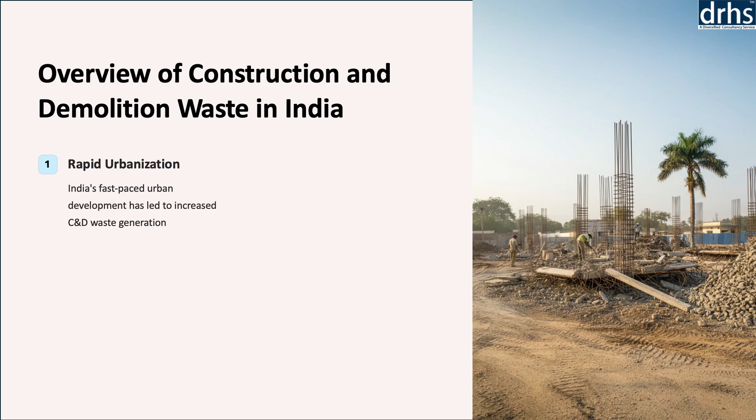The second factor is related to the economic impact of managing C&D waste, which is substantial. Proper waste management can reduce construction costs through material recovery, recycling, and reuse. Recycling concrete, steel, and other materials lowers dependency on raw resources, contributing to the circular economy. However, improper disposal of C&D waste leads to inefficient resource use, increased cost for waste management, and environmental degradation.

The third factor is related to the environmental concerns associated with C&D waste, which are significant. Improper disposal contributes to air pollution, clogged drains, and groundwater contamination. Additionally, the depletion of landfills and the illegal dumping of debris exacerbate urban environmental challenges. Recycling C&D waste can mitigate these effects by reducing landfill usage and minimizing pollution.

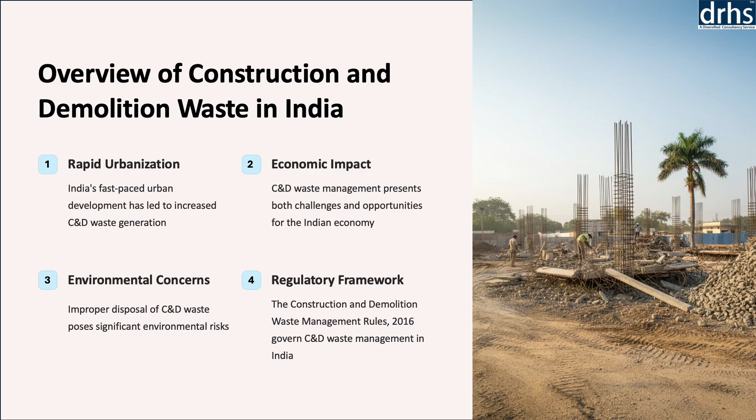The fourth factor is related to India's regulatory framework for C&D waste management, which is evolving over time. The Ministry of Environment, Forest and Climate Change introduced the Construction and Demolition Waste Management Rules 2016. These rules mandate source segregation, recycling, and the use of recycled products in construction. Urban local bodies are responsible for implementing these rules and setting up recycling facilities. Despite these regulations, enforcement remains inconsistent and increased compliance is needed to improve waste management practices.

Now we shall see the magnitude of C&D waste in India. India's construction boom has led to a substantial increase in construction and demolition waste generation. According to a report by the Center for Science and Environment, the country produces approximately 150 million tons of C&D waste annually. However, formal collection and processing infrastructure covers only a fraction of this waste, highlighting the need for an enhanced waste management system. The composition of C&D waste varies based on the type of construction activities.

Approximately 30% of the total C&D waste consists of concrete, including structural elements like beams and slabs. Concrete waste can be recycled into aggregates used for roads, construction, pavement blocks, and new construction production. Another significant component is excavated material, accounting for 25% of the total waste. This includes soil, sand, and stone, often generated during land preparation and excavation for foundations. Proper reuse of these materials can reduce the demand for virgin resources.

Bricks and masonry make up around 15% of the total C&D waste. These materials can be crushed and reused as a base material for roads or as a filler in new construction. The efficient recycling of bricks and concrete helps reduce environmental pollution and raw material consumption.

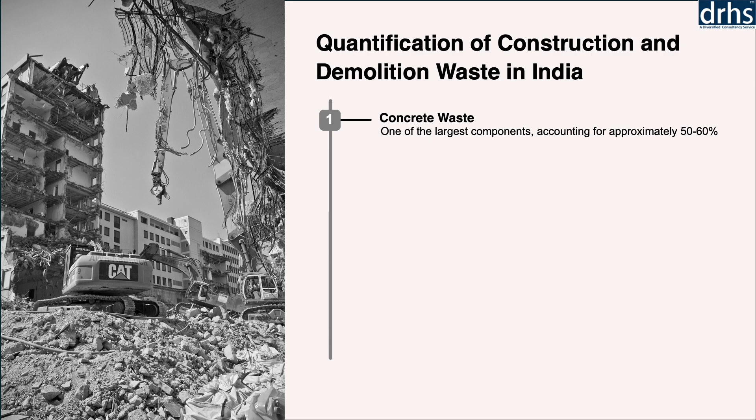Concrete is one of the largest components of C&D waste, accounting for approximately 50 to 60% of the total waste generated. Concrete waste is often generated from demolished buildings, roads, and infrastructure projects. Proper recycling of concrete can produce aggregates that can be reused in new construction projects.

The second is related to brick waste. Bricks are another significant component of C&D waste, making up about 15 to 20% of the total waste. Broken or discarded bricks are often sent to landfills, although they can be recycled into new bricks or used as an aggregate in construction.

The third is related to wood waste. Wood accounts for around 5 to 10% of C&D waste. It is commonly produced during the demolition of buildings and the removal of furniture, doors, and windows. While wood is biodegradable, it still contributes to the overall volume of waste, and improper disposal can cause environmental problems.

Fourth is related to metal waste. Metals like steel, iron, aluminium, and copper contribute around 5 to 10% of the C&D waste. These materials are often recyclable, but improper disposal leads to resource wastage. Recycled metal can be reused in construction and infrastructure projects.

The other is related to glass waste. Glass, though a smaller component of C&D waste at approximately 1 to 5%, can be recycled and reused in construction. However, its disposal is often problematic as it does not degrade naturally and can pose a risk to the environment as well as to human beings.

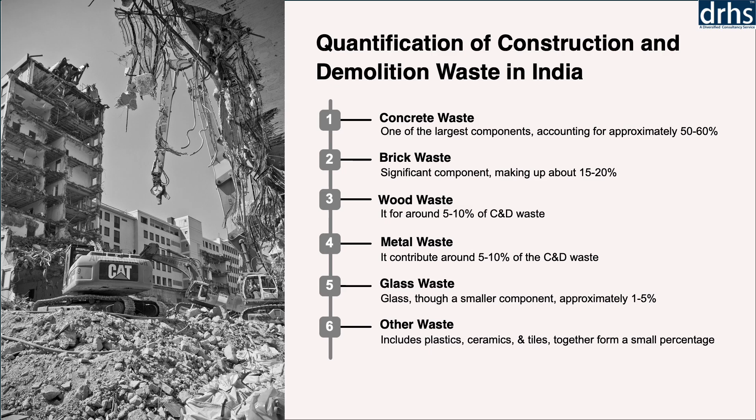Now we shall discuss the regional distribution of construction and demolition waste in India, highlighting the contribution from the various urban and rural regions.

First is related to major metropolitan areas. India's largest metropolitan cities, Delhi, Bombay, Ahmedabad, and Bengaluru, are responsible for generating nearly 40% of the country's total C&D waste. These cities have undergone rapid infrastructure development, including urban renewal projects, large-scale real estate construction, road expansion, and public transportation systems. For instance, Delhi, with its continuous expansion of metro network and flyovers, generates significant volumes of C&D waste.

Mumbai's urban densification and redevelopment of slums contribute heavily to the rising waste level. Similarly, Bangalore's booming IT and residential infrastructure sectors make it one of the top C&D waste producers. These metropolitan areas also face challenges in managing and recycling waste as the disposal often exceeds the capacity of existing treatment plants.

The next comes the tier-two and tier-three cities. Emerging urban centers like Pune, Lucknow, Indore, and Chandigarh are experiencing a construction boom due to the increased demand for housing, commercial space, and infrastructure. These cities contribute approximately 30% of India's C&D waste.

Next is weak enforcement. Weak implementation of C&D waste management regulations contributes to non-compliance. Although the 2016 rules mandate that all local authorities establish waste management plans, enforcement remains lax. Many municipalities lack dedicated monitoring systems and resources to ensure proper collection, transportation, and processing of C&D waste. This weak oversight leads to rampant illegal dumping and environmental degradation.

The next is economic barriers. The high cost of recycling infrastructure and transportation limits private investment in C&D waste management. Setting up common construction and demolition waste treatment facilities requires significant capital. Additionally, operational costs are higher, reducing profitability for recyclers. Financial incentives, subsidies, and public-private partnerships are needed to enhance economic viability.

The last is limited market for recycled products. Despite regulatory mandates encouraging the use of recycled material, the market for recycled aggregates and other C&D derived products remains limited. Builders often prefer virgin material due to perceived quality concerns and strength of the material, despite evidence showing comparable performance. The lack of quality certification mechanisms and promotional strategy further impedes market growth for recycled products.

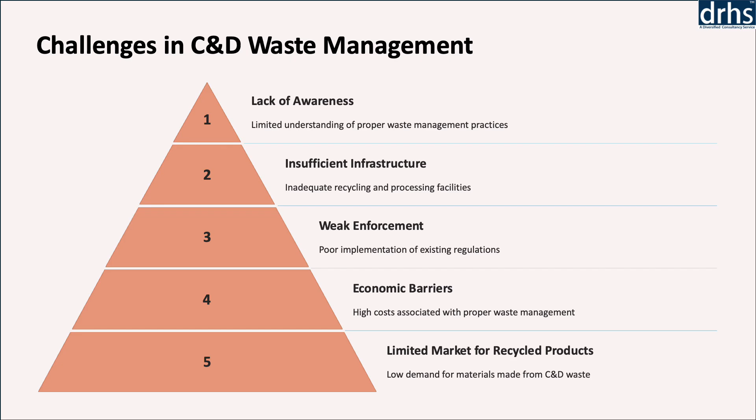Let us discuss the impact of construction and demolition waste on the environment and the economy. India's rapid urbanization and infrastructure development generate millions of tons of C&D waste annually. Mismanagement of this waste poses significant environmental and economic challenges. Let us first explore the environmental impact, starting with landfill saturation.

The improper disposal of C&D waste has led to the saturation of existing landfills. Since a substantial portion of this waste includes materials like concrete, bricks, and debris that are not biodegradable, it consumes valuable landfill space that could otherwise be used for municipal solid waste. The unauthorized dumping of C&D waste on roadsides and open spaces further exacerbates the problem, affecting the urban landscape and the drainage system.

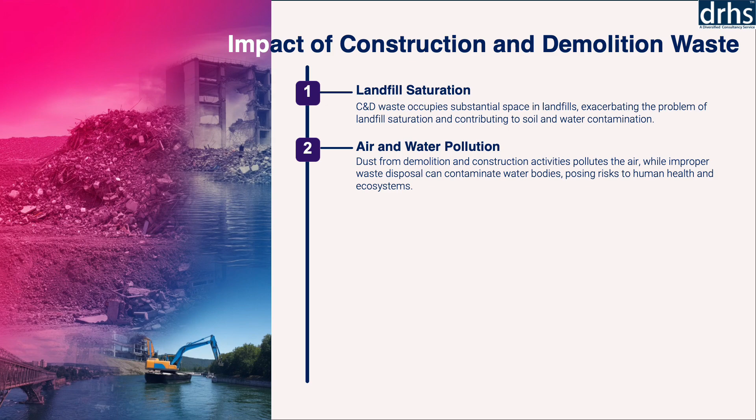The next issue is related to air and water pollution. C&D activities produce dust and particulate matter, that is PM10 and PM2.5, significantly contributing to air pollution in urban areas. Dust from demolition and construction sites causes respiratory issues, particularly in densely populated cities like Delhi and Mumbai. In addition, improper disposal near water bodies can result in sedimentation buildup and water pollution, affecting the aquatic ecosystem and reducing water quality.

The next issue is related to resource depletion. Construction relies heavily on natural resources such as sand, stone, and aggregates. Excessive extraction of these materials depletes finite resources, leading to soil erosion and habitat destruction. Failure to recycle C&D waste results in increased demand for virgin material and intensified resource exploitation.

So these were the environmental impacts, and now shall we explore the economic impact. This is related to lost economic value. C&D waste contains valuable materials like metals, concrete, and wood that, if recycled, could generate economic returns. However, limited recycling results in the loss of potential revenue.

Studies suggest that efficient C&D waste management could significantly reduce costs and enhance sustainability. Recycling concrete and using secondary aggregates reduces the need for new material, offering economic savings.

The next economic impact is related to increased construction cost. The lack of affordable recycling infrastructure and proper waste disposal mechanisms increases overall construction costs. Builders face higher expenses when transporting waste to distant disposal sites or using expensive virgin materials instead of recycled products. Investing in waste recycling plants and adopting a circular economy approach could mitigate these costs.

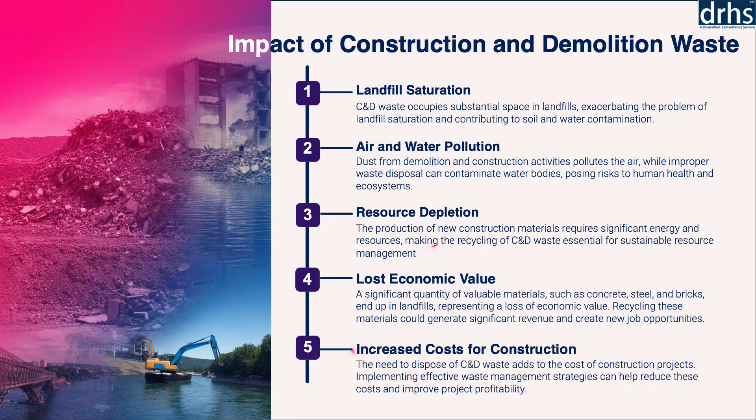In conclusion, effective C&D waste management is crucial for mitigating environmental pollution, conserving natural resources, and realizing economic value. Implementing stricter regulations, enhancing recycling infrastructure, and fostering market demand for recycled materials will be essential to achieving sustainable construction practices in India. Now let us explore the impact more deeply of C&D waste on urban development.

The impact of construction and demolition waste on urban development in India is significant, as rapid urbanization drives massive infrastructure and housing projects, generating a vast amount of debris. Improper management of C&D waste hinders sustainable growth in three key areas.

The first is related to urban renewal projects. Urban renewal projects in cities like Delhi, Mumbai, and Bangalore produce large quantities of C&D waste from demolishing old structures. When this waste is not properly recycled or disposed of, it overruns landfills and open spaces, leading to land use inefficiency and delays in project timelines. Effective recycling systems reduce debris and ensure smoother, faster urban regeneration projects. However, weak enforcement of the C&D Waste Management Rules of 2016 adds to the inefficiency.

The second is related to infrastructure development. Major infrastructure initiatives including highways, bridges, and smart city development generate extensive C&D waste. Without efficient recycling plants, these projects cause land and water pollution, impacting the urban ecosystem. Infrastructure construction also leads to increased resource depletion, as natural materials like sand and aggregates are used in excess due to limited reuse of recycled material. This escalates project costs and environmental degradation.

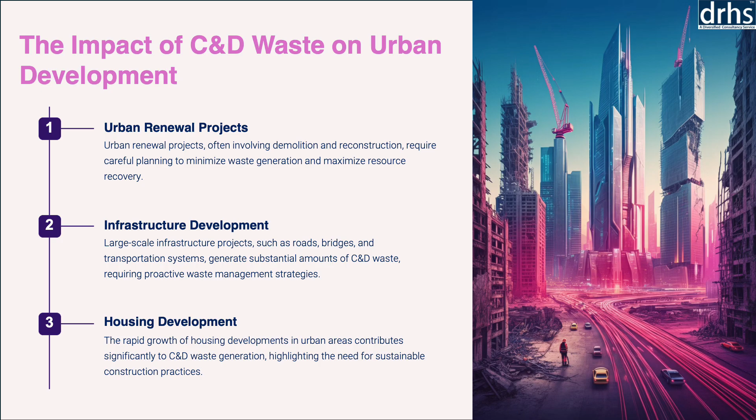Now, since we have discussed the various types of impact on this sector, let us explore the different roles involved.

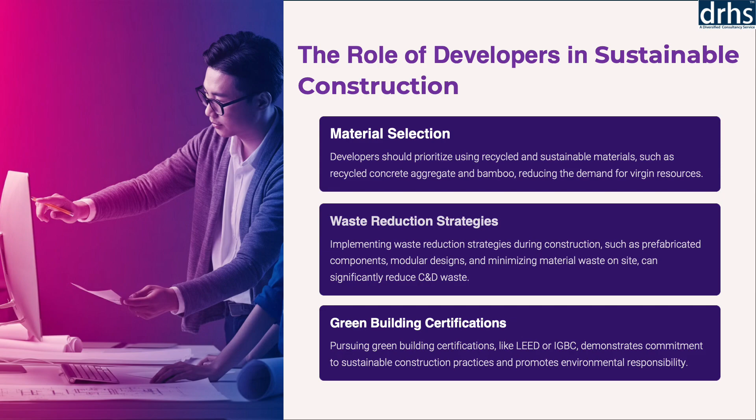In conclusion, developers in India have a significant role in promoting sustainable construction through careful material selection, effective waste reduction strategies, and comprehensive green building practices. By adopting these practices, developers not only contribute to environmental preservation but also create economically viable and socially responsible projects.

Now we shall discuss the role of the construction industries. The construction industry in India plays a pivotal role in the nation's economic development, contributing significantly to the GDP and providing employment to millions.

As the industry grows, adopting sustainable construction practices has become increasingly important. Sustainable practices such as using eco-friendly materials and energy-efficient design help reduce the environmental impact of construction projects. For instance, the use of recycled material like fly ash in cement production can significantly lower carbon emissions.

Investing in waste management technology is another crucial aspect of sustainable construction. Advanced technology can help manage construction and demolition waste more effectively, reducing the amount of waste sent to landfills and promoting recycling. This not only minimizes environmental harm but also contributes to resource efficiency.

Partnering with waste management companies is essential for ensuring proper waste disposal and recycling. Collaboration with specialized companies can enhance the industry's ability to handle waste responsibly and sustainably, leading to innovative solutions for waste reduction and management. By adopting sustainable practices, investing in waste management technologies, and partnering with waste management companies, the construction industry in India can contribute to a greener and more sustainable future.

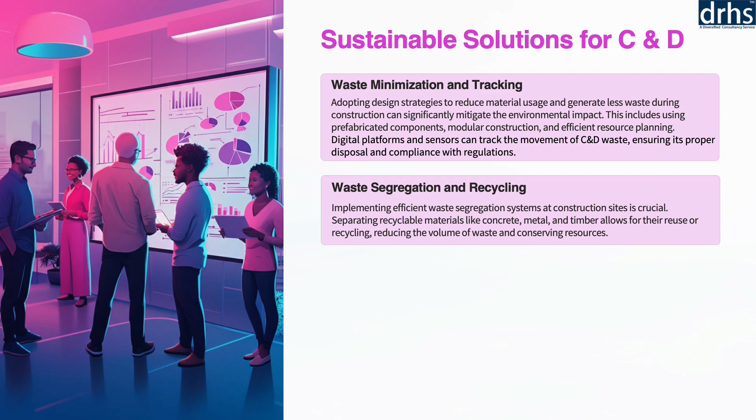The next is waste segregation and recycling. Effective waste segregation at source is essential for recycling efforts. Materials such as concrete, wood, metal, and plastic should be separated to facilitate their recycling. Recycling these materials reduces demand for virgin resources and lowers the environmental impact. Recycled material can be reintroduced into the construction process, promoting a circular economy. For example, using recycled concrete aggregates in new construction projects is an eco-friendly practice gaining traction in India.

The next is waste treatment and processing. Waste treatment involves various methods to process waste, making it safer and more manageable. Biological treatment processes like composting can handle organic waste effectively. Chemical treatments can detoxify hazardous materials, ensuring they don't harm the environment. Mechanical processes such as crushing and screening can prepare material for recycling. These treatment methods help reduce the volume and toxicity of construction and demolition waste.

The next, most important, is waste to energy solutions. These are innovative approaches to managing construction and demolition waste. Technologies like incineration and gasification convert waste into energy, providing a dual benefit of waste reduction and energy generation. These processes help divert waste from landfills and contribute to India's renewable energy goals. For instance, the implementation of waste to energy plants in urban areas can significantly reduce the waste burden while generating electricity.

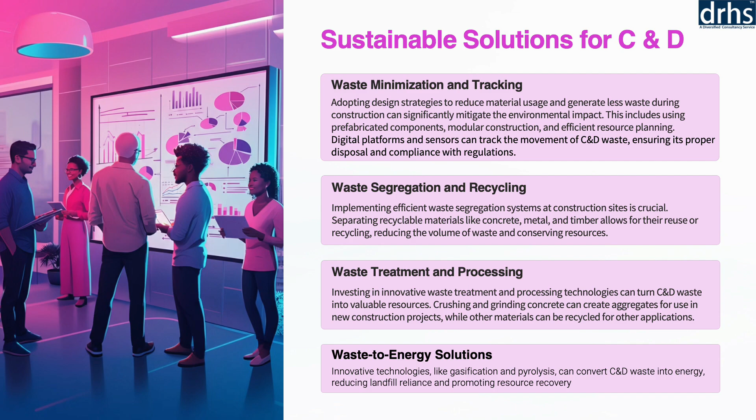Implementing these sustainable solutions requires collaboration among government agencies, private sectors, and local communities. By adopting waste minimization, segregation, recycling, treatment, and waste to energy solutions, the construction and demolition industry in India can move towards a more sustainable and environmentally responsible future.

Now, the next role is related to research and development. The construction and demolition industry in India is a significant contributor to waste generation, necessitating effective management strategies. Research and development, R&D, plays a crucial role in addressing these challenges through innovative solutions such as waste to energy technologies, material recovery and recycling, and sustainable construction materials.

First is waste to energy technologies. These offer a sustainable solution by converting waste material into energy. The Ministry of New and Renewable Energy in India promotes various waste to energy options, including biomethanation, which converts organic waste into biogas and manure. This not only helps in managing the waste but also generates renewable energy.

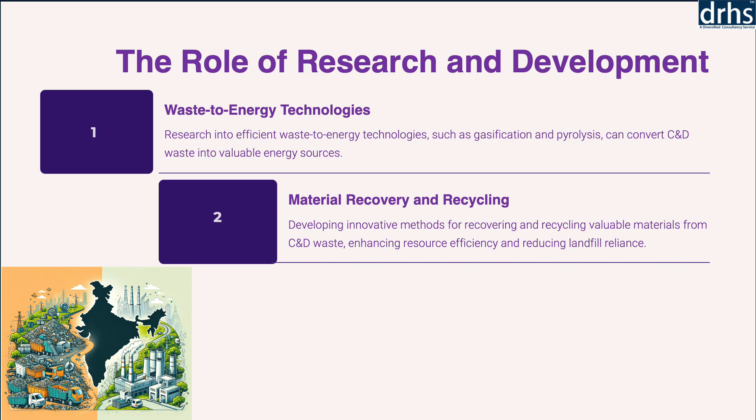The next is material recovery and recycling. Recycling construction material is essential for reducing environmental impact. Techniques such as remanufacturing, downcycling, and upcycling are employed to recover and reuse materials like concrete, bricks, wood, and metals. This approach minimizes waste, conserves resources, and supports a circular economy.

The next is sustainable construction material. The use of sustainable materials in construction is gaining traction. Materials such as recycled concrete and eco-friendly bricks reduce the environmental footprint of construction projects. R&D efforts focus on developing new materials and improving existing ones to enhance their performance and sustainability.

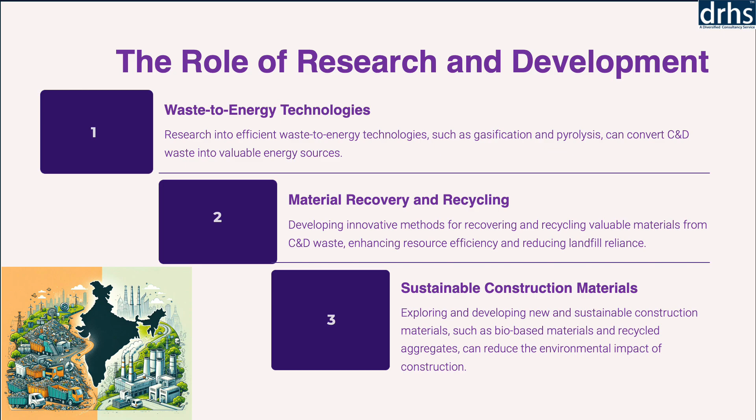Overall, R&D in the construction and demolition industry is vital for promoting sustainable practices and reducing environmental impact. By leveraging waste to energy technology, material recovery and recycling, and sustainable construction material, India can move towards a more sustainable and efficient construction sector. Now we shall discuss some of the best international practices.

The construction and demolition industry in India can benefit from international best practices to enhance sustainability and efficiency. Here are some notable examples. First is Singapore's waste to energy approach. Singapore has successfully implemented a waste to energy approach, converting construction and demolition waste into energy and significantly reducing landfill reliance. The National Environment Agency oversees waste management, ensuring a high recycling rate of 99% of construction and demolition waste since 2013. This approach not only manages waste effectively but also generates renewable energy.

The next country is Japan's construction recycling system.

Japan has a well-established construction recycling system supported by the Construction Material Recycling Law enacted in 2000. This law mandates contractors to sort and recycle specific construction materials such as concrete, asphalt, and wood from demolition projects. The system includes strict regulations and incentives to promote recycling, aiming for a recycling rate of 95% for specified construction material.

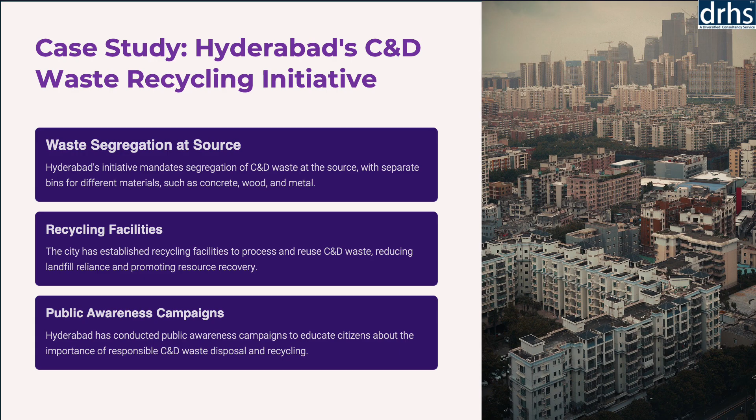The Greater Hyderabad Municipal Corporation ensures that a large quantity of construction and demolition waste is recycled and reused, promoting a circular economy. Hyderabad's construction and demolition waste recycling initiative serves as a model for other cities in India, demonstrating the importance of segregation, recycling facilities, and public awareness in achieving sustainable waste management.

Now let us discuss the government initiatives and policies in this regard. The Indian government has implemented several initiatives and policies to manage construction and demolition waste effectively. These efforts aim to promote sustainable practices and reduce environmental impact.

First is the National Green Tribunal (NGT). The National Green Tribunal plays a pivotal role in enforcing environmental law related to construction and demolition waste. Established under the National Green Tribunal Act of 2010, the NGT ensures timely resolution of environmental disputes and promotes sustainable development. The NGT has jurisdiction over cases involving air, water, and soil pollution, industrial emissions, waste management, and deforestation.

The second is related to the Solid Waste Management Rule of 2016. The Solid Waste Management Rule of 2016, introduced by the Ministry of Environment, Forest and Climate Change, extends beyond municipal areas to include urban agglomerations, census towns, and industrial townships. These rules mandate segregation of waste at source, promote recycling, and set targets for waste processing. The rules also emphasize the responsibility of waste generators to segregate waste into wet, dry, and hazardous categories.

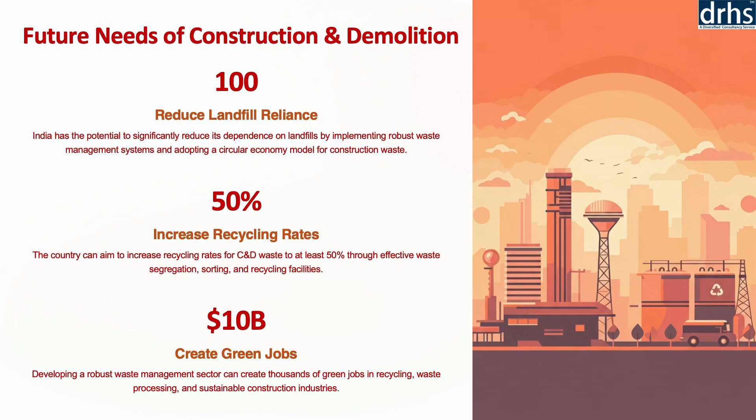Prioritizing these areas will enable India to build a sustainable, resource-efficient future while boosting its economy and conserving the environment. Now, since we have discussed the policy level interventions, let us see what are the recommendations for investors in the construction and demolition sector.

Investing in the construction and demolition sector in India offers significant opportunities for growth and sustainability. Here are some key recommendations for investors.

The first is related to investment in sustainable construction companies. Investors should consider funding companies that focus on sustainable construction practices. These companies are developing innovative solutions to reduce environmental impact, such as using recycled material and energy efficient technology.

For example, startups like Angirus and Recycle X are creating environmentally friendly building materials from construction waste and plastic waste. Supporting such companies can drive the adoption of sustainable practices in the industry.

The second is related to funding waste management infrastructure. Investing in waste management infrastructure is crucial for effective construction and demolition waste management. The Waste to Wealth mission, spearheaded by the Office of the Principal Scientific Advisor to the Government of India, aims to transform waste management through advanced technology.

Investors can support projects that convert waste into valuable resources such as energy and recycled material. This not only helps in reducing landfill waste but also creates economic value.